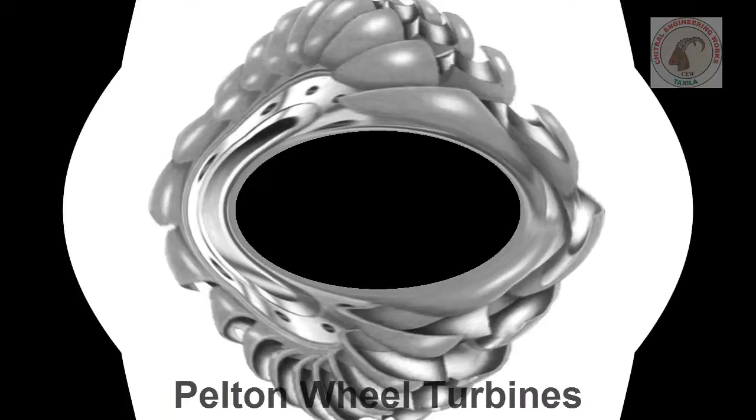In the name of Allah, the most beneficent, the most merciful, I am starting my next topic, Pelton wheel turbines. Pelton wheel turbine was invented by Lester Allen Pelton in 1870. This turbine is the pure form of impulse turbine and highly efficient. This turbine is suitable for high head and low water discharge.

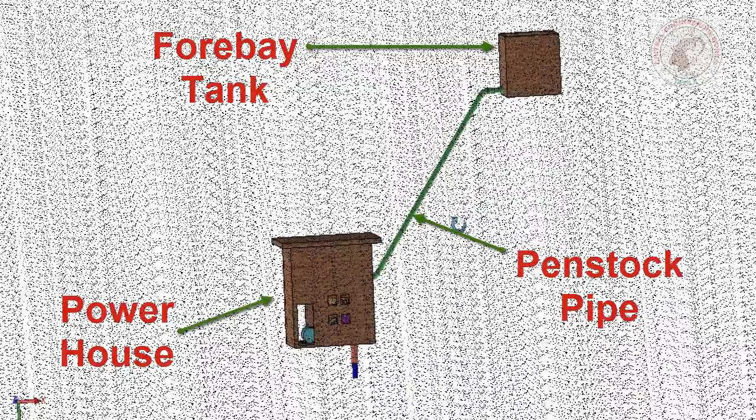Starting with the parts and assembly of Pelton wheel turbine. Powerhouse, penstock pipe and forebay tank. If we get inside the powerhouse, the turbine and generator set is installed on this layout. The penstock pipe is connected with the jet assembly, which produces a high-speed jet of water.

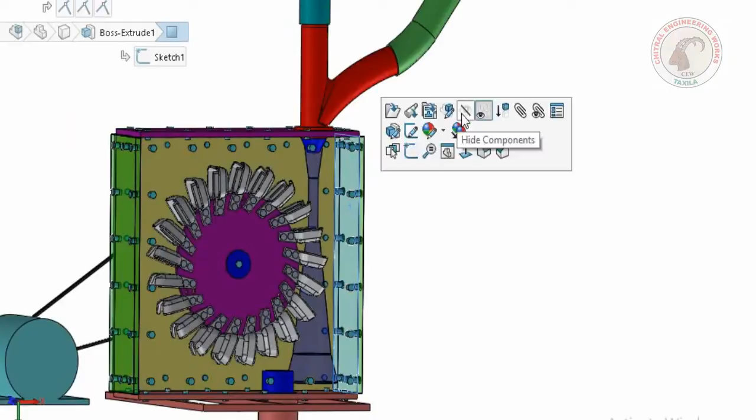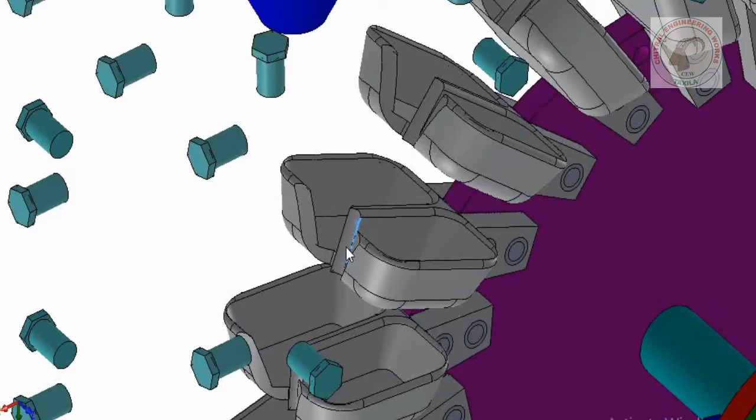This high-speed jet of water strikes the buckets of the runner and rotates it. When the high-speed jet of water strikes the bucket, it splits into two parts. Watch this animation to understand.

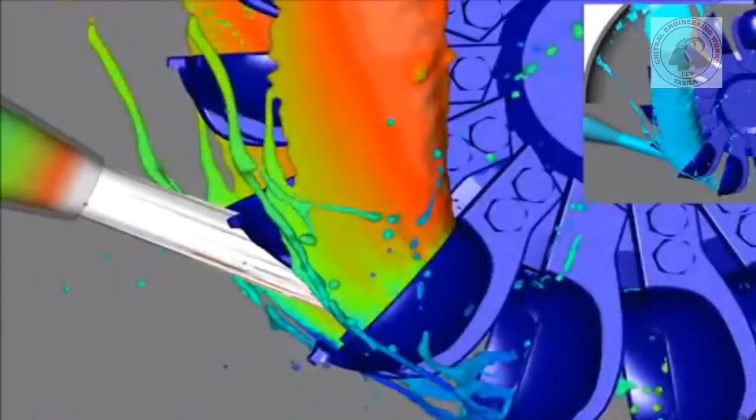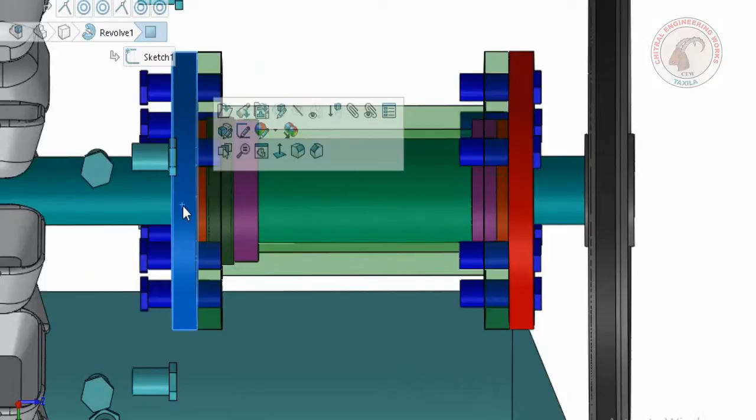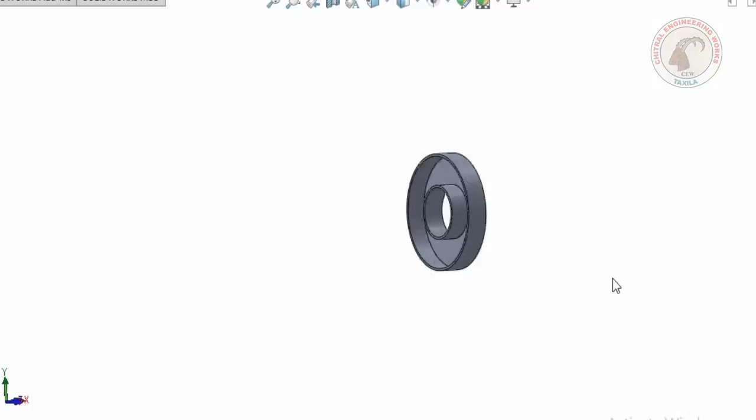This is a small-scale model turbine. The part in front of you is the bearing housing, inside of which there are 2 bearings, 2 water seals and 1 shaft. This is the water seal which stops the water from entering into the bearing housing. This is the bearing housing.

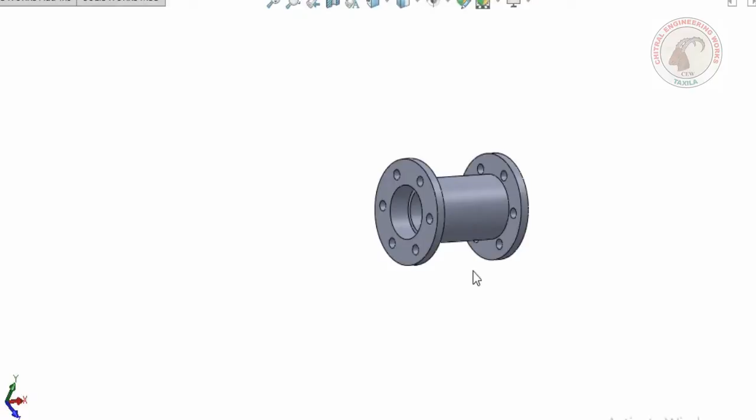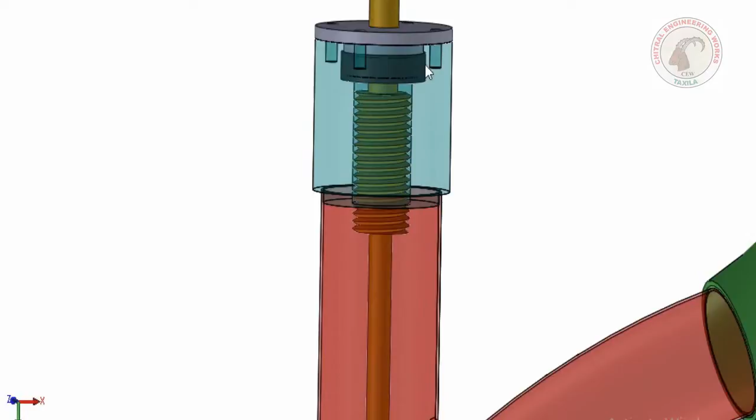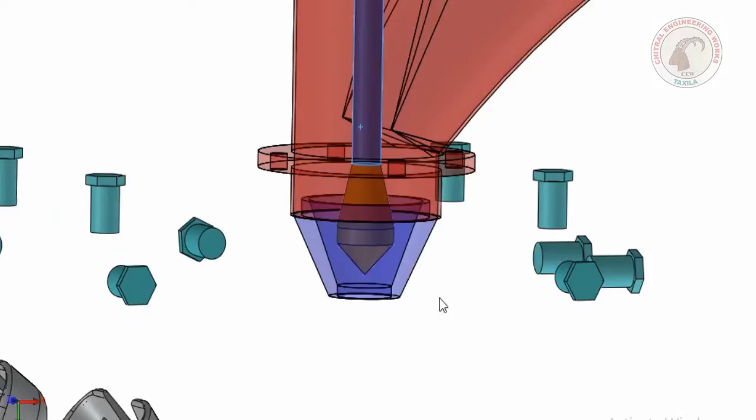Now observing the jet assembly closely. This is another water seal which stops the water from coming out from the jet assembly. This is the nozzle which makes the jet. The stainless steel needle which controls the flow of the jet. The stainless steel needle is controlled by rotating this disc.

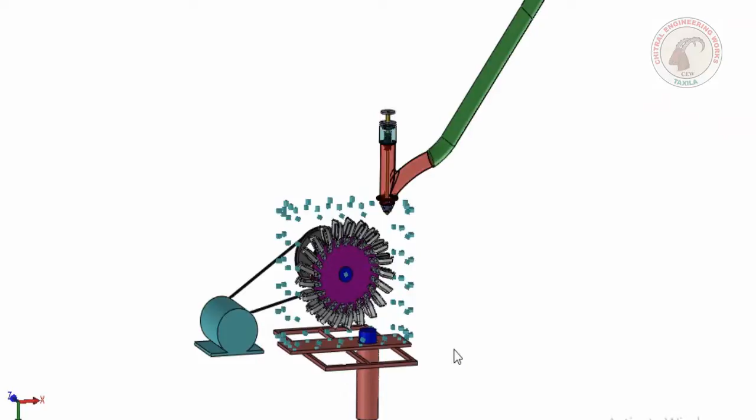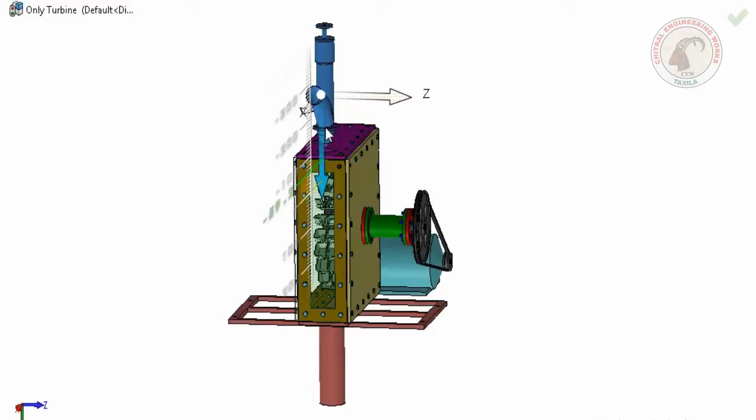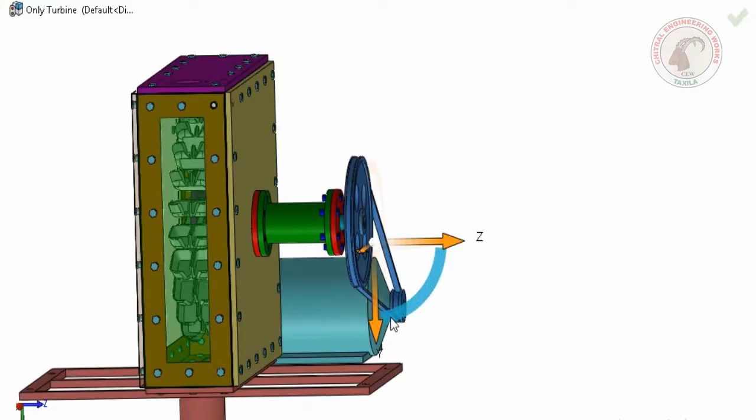Now removing all the parts one by one. Jet assembly. Belt and pulleys set. Bearing container.

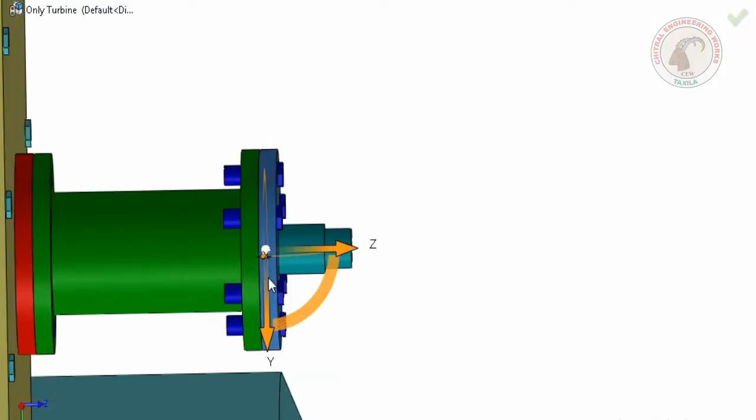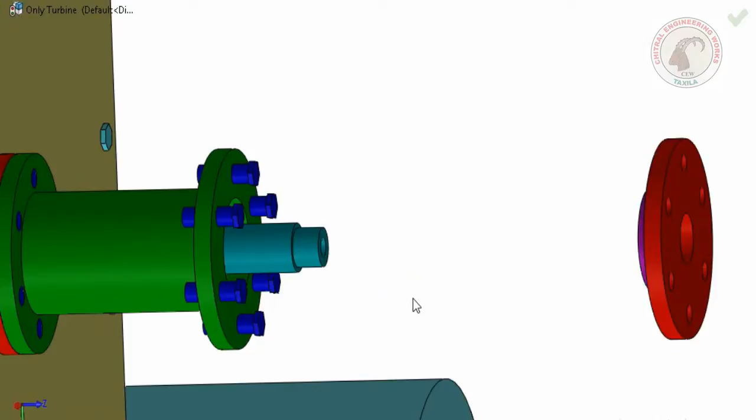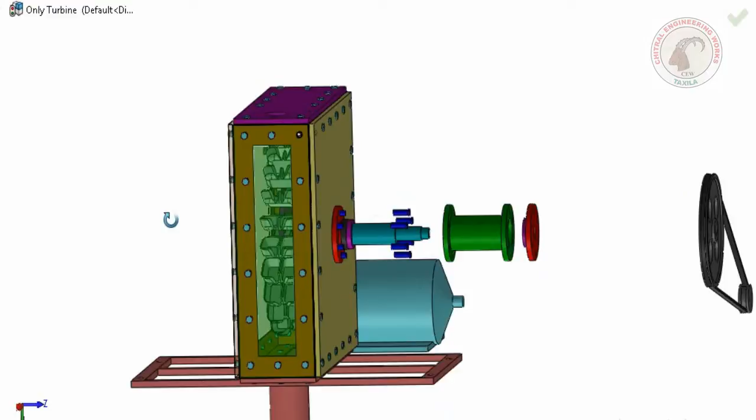Bearing. Bearing housing. Here is another bearing and water seal with black color. Front plate of transparent plastic.

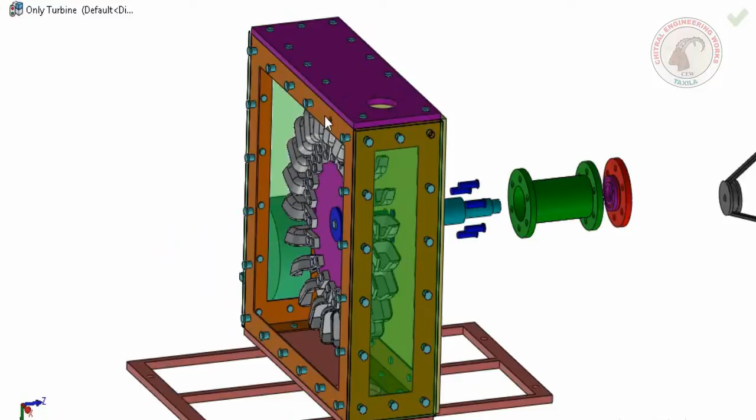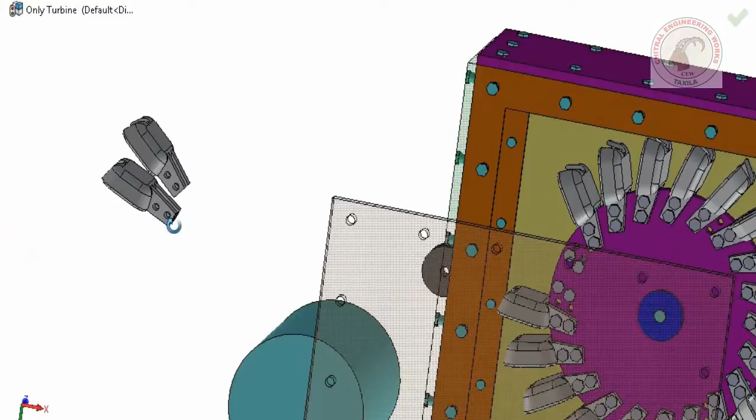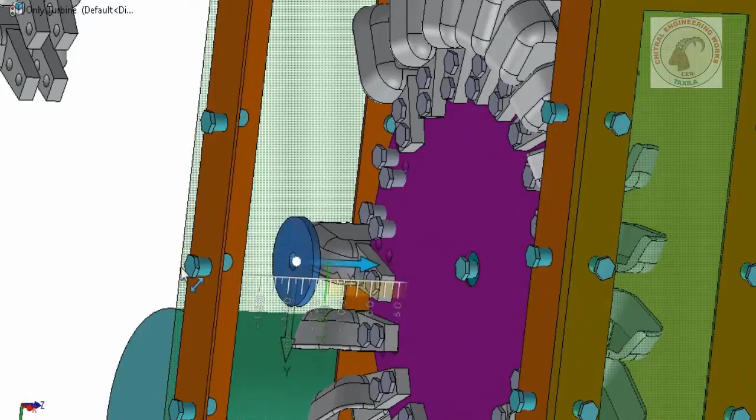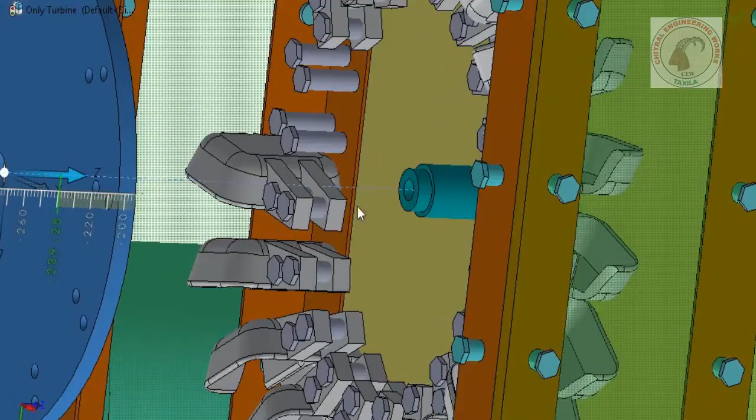Buckets. Runner washer. Runner bolt. Runner disc. Discharge tube with base frame.